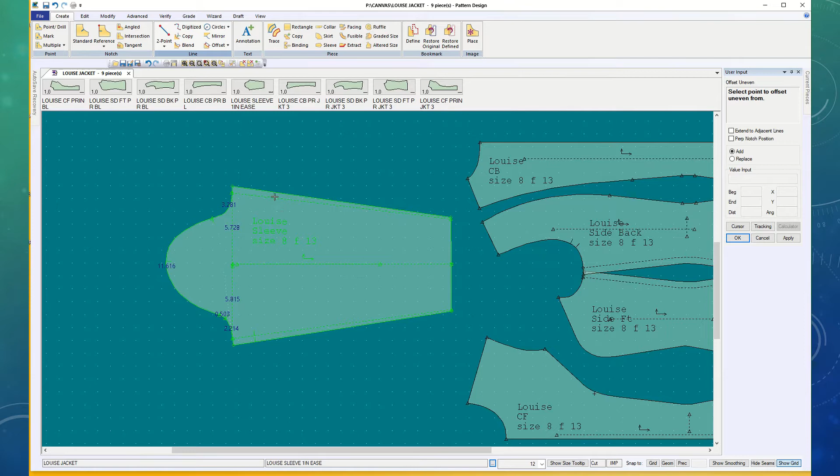I could have come over here and chosen, when I did create offset uneven, I chose to add the line. I could have chosen replace, and then I wouldn't have to delete or swap. But I like you to see what I'm doing. So as long as you can keep track of what you're doing, you can select replace instead.

But sometimes I like to see what I did and leave the lines on until I get all finished so that I know I've done all the things that I plan to do. But you're young and you have fantastic memories. Just keep track of it, or it won't sew together properly.

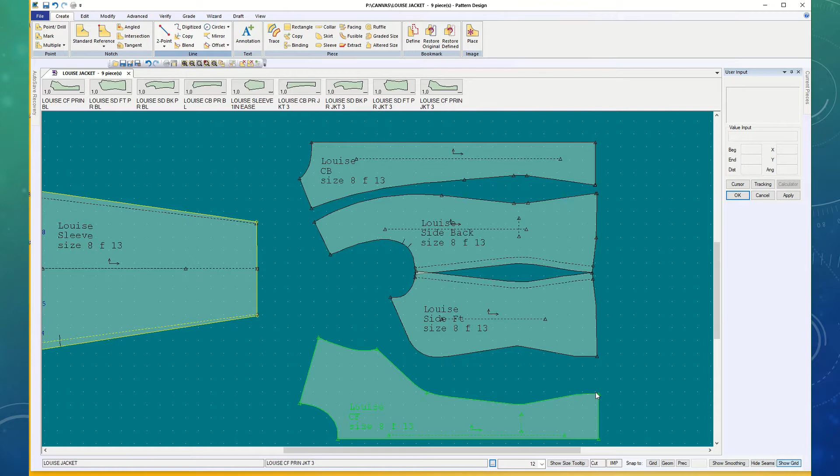Okay, right here, I don't really want that to hug the body. I maybe could leave it on the side. Maybe I do want it to hug the body. But this line right here in front is awkward, and I would rather add a little bit of extra flair to it.

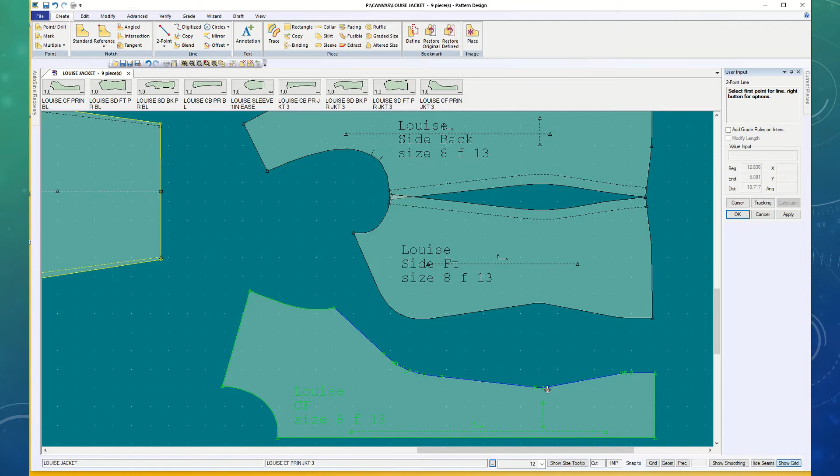So to do that, I'm going to create a 2-point line, and I'm just going to join this line and bring this line out. And as I zoom in, I can see where it's on top.

I don't want to make it any smaller, but now I've got this line and I can swap that and extend it out. But I want a copy of that over here, and I want it to be the same angle as this one.

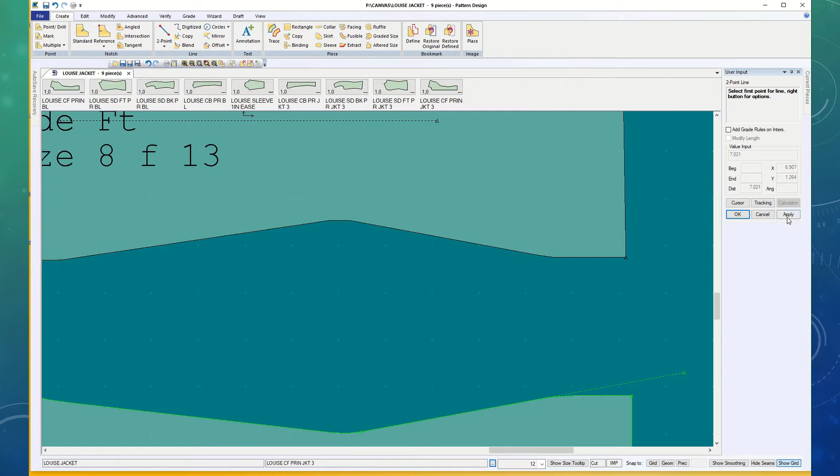So I'm going to say OK, and that one I didn't have to say Apply. I don't know why you have to on the other one, but you do. So since I want the same line, I'm going to create mirror, and I want to mirror this line. I don't have a line in the middle to mirror around, so I'm going to mirror around a straight line.

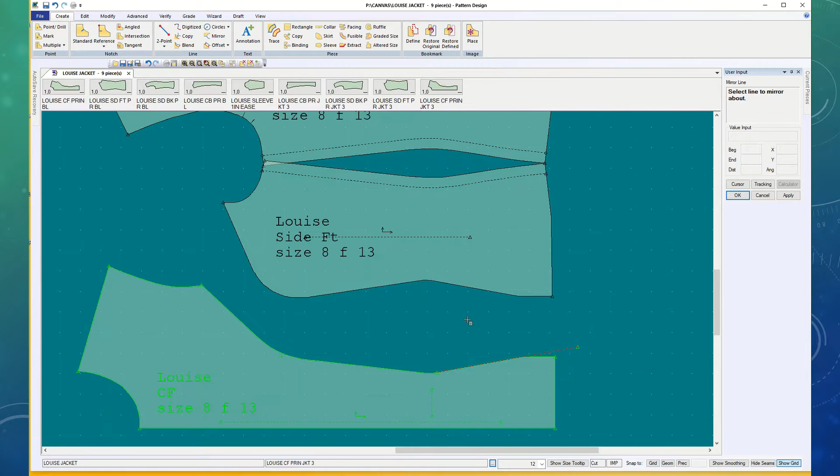And when I did that, the line ended up over here. And so I'm going to copy that and put it on this piece. Create line, copy, because the important thing to me was to get the correct angle.

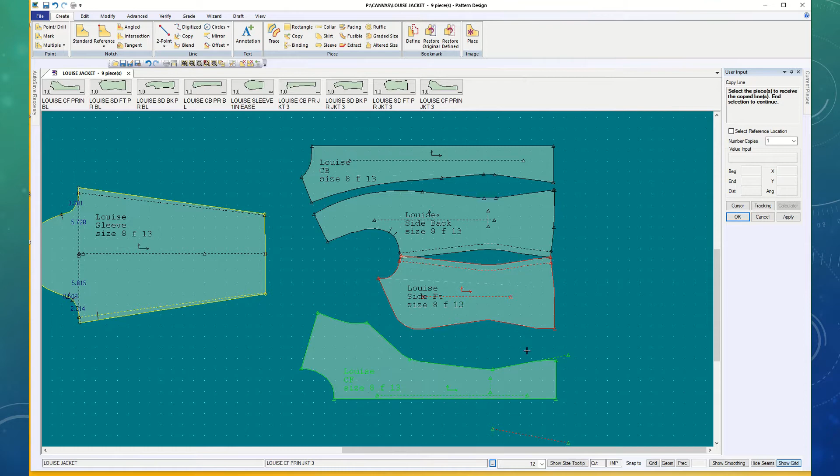So I'm going to copy this one, and I'm going to put it on this piece, and say OK, and now I've got the line, and usually I say cancel, but this time I want it to end up right on the line so I can swap it.

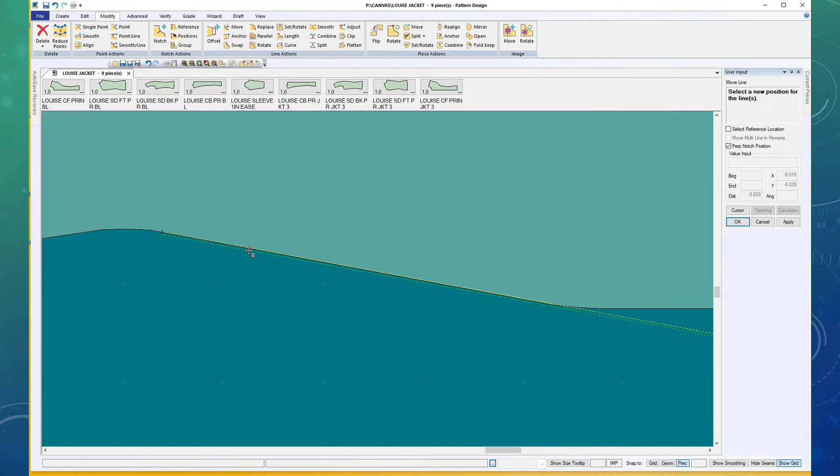And it looks like I didn't quite get it. So I'm going to move the line, modify line, move, and it is possible to come down here at the bottom. If you look at the bottom of the screen where it says precision, I usually hate precision, but sometimes it can be helpful. I still don't think I got that as well as I want to, so precision isn't being my friend. Okay.

Zooming all the way in. Oh, look at how far off that was. So I'll just set it down on top. Okay.

So you know the drill: split and swap. Modify line, split. Zoom in, split the solid line where the line ends. You can do them both at the same time. Say OK. Modify line, swap. Choose the dotted line, trade it for the solid line.

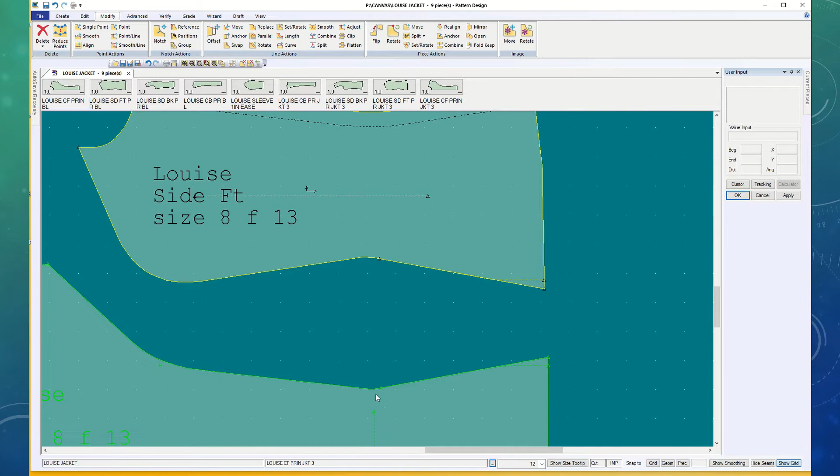Same. OK, and then delete. So now with this line, we're not... if you have a bit of a mush ball in front, that's going to fit better. If you are nice and perfectly flat and well toned, you might want to show off your shape exactly. So that's up to you, but that's the choice I made. But you don't want it to be an abrupt change, so at least put in a curve if you don't straighten out that line.

Delete line, this one. Okay.

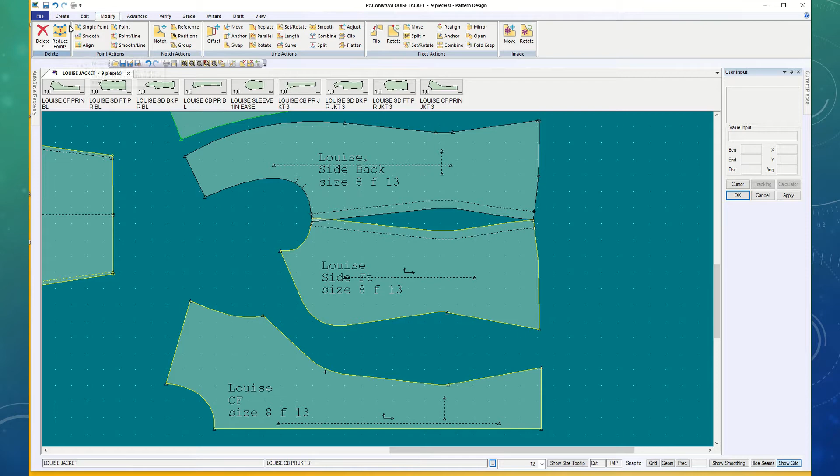Wow, how am I going to decide that? What would happen if I put a straight line there? Create 2-point line, zooming in, how straight is that line? It's going to be a little weird to try and line up and do the hem.

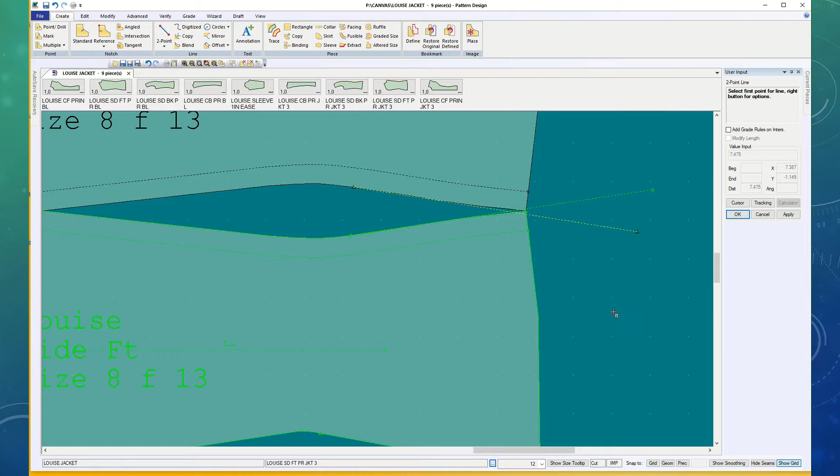And if I come straight across from this and put in another line, maybe I don't have to do all of the flipping. Maybe that's going to be just as easy. Modify line, split. It depends on how steady-handed you are and whether or not you can tell if you're lined up on the line.

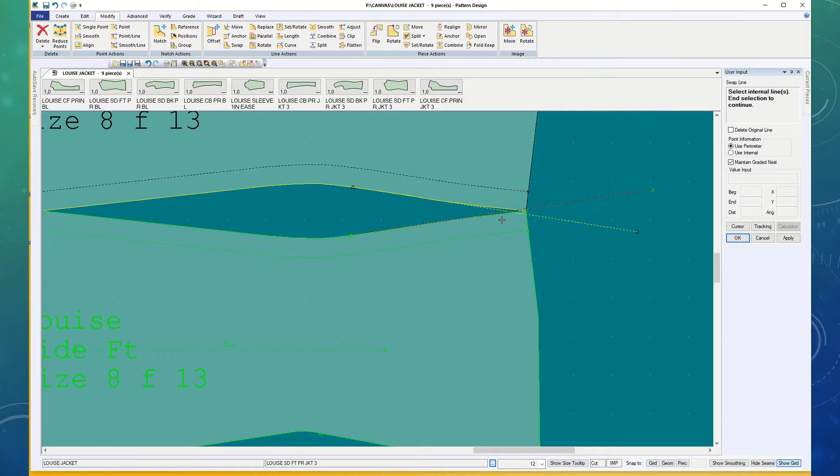If it's less than a 1/16 of an inch, you can usually get away with it. But if it's a lot and it makes a difference in the way it looks, in the long run, you're not going to want to put something into production that looks messy, that is harder for the sewers to sew.

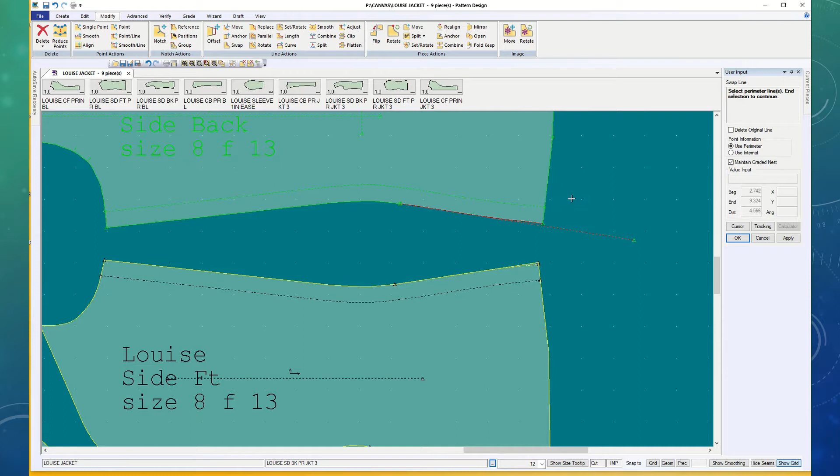Delete the line. I have to choose that in order for it to know that's what I mean. Okay, so I need to merge. Modify line, combine.

And if I'm going clockwise, it's opposite, depending on the side of the piece. These I will eventually need to merge, but I'm not sure if I need them yet or not.

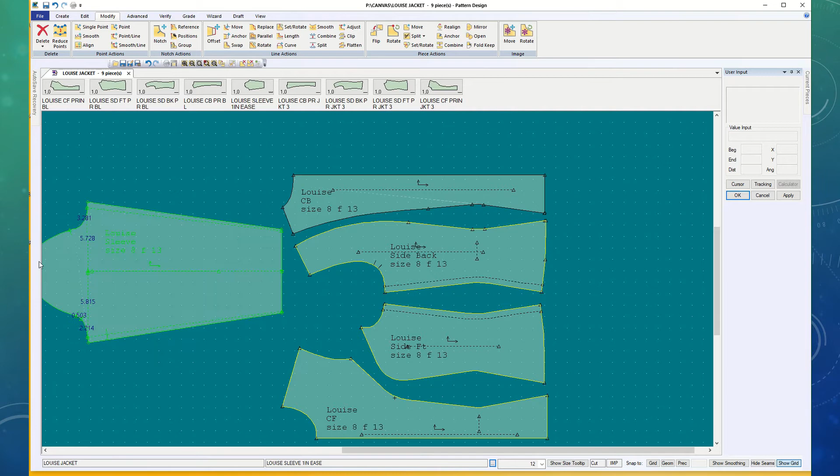Okay, so the next thing I'm going to do is clean up the hem. You have already changed your sleeve, and I've got the fitted one, but if you want gathers in it, then now would be when you would add.

And you spread it open with the slash and spread under advanced fullness, and you could do parallel or variable or tapered, any of those. If you do it that way, if you end up with...

I want 2-point curves. If you end up with your curves kind of apart like this, then you're not going to want to come along with a straight line. You might even want to come along and raise it a little bit depending on the look you want. Or maybe you'll just make a small blend right there, but it isn't going to be a straight line. It's going to be a smooth curve there.

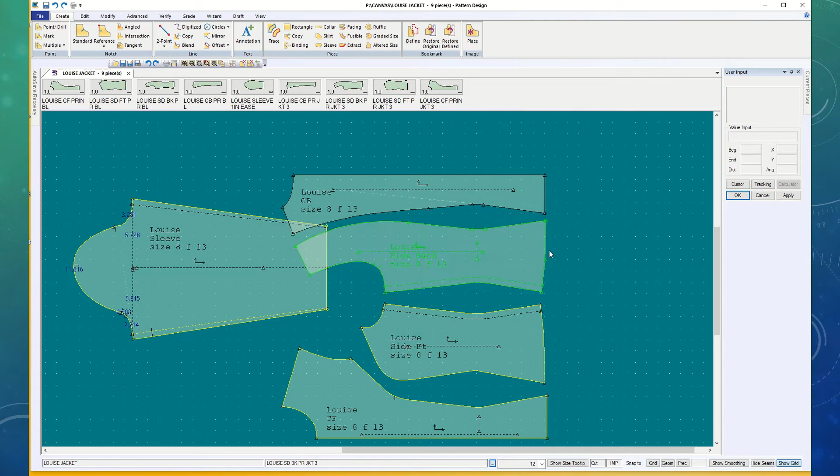Okay. So now we need to do the hem. And if you want to, you can lengthen it now. Just lengthen them all the same amount. I'm going to just leave it that length. Modify, set, rotate.

I want to start at the other end. The one that's not moving is first. Cancel. It's a lot easier to put those together to smooth the hem if they both end up straight. Another way to do this and not have to say cancel is to switch to value.

Well, that's not going to be good. Do I have that on the other side too? Okay, I guess they'll line up and we'll fix it when we're changing the shape of the curve. Modify, set, rotate. Same.

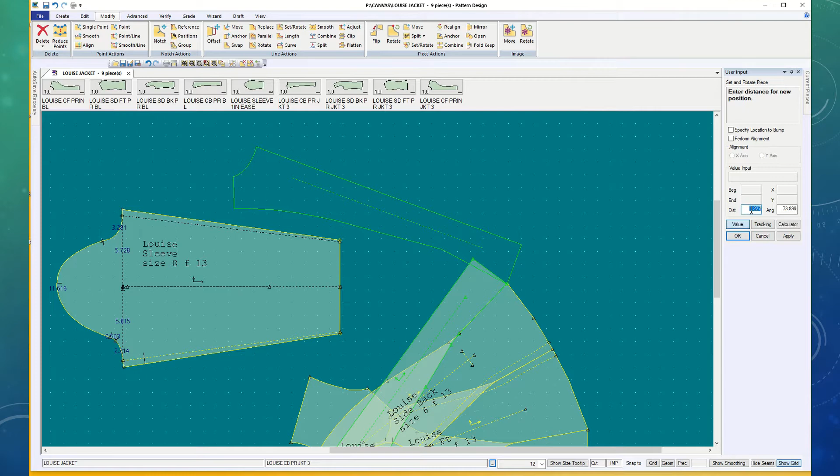But if it's on value, you can type in 0 and say OK, and it does the same thing. So 0 or cancel. So nice smooth curve, I've got right angles at the beginning and the end. And I may or may not want to do it all in one shot. Try it, I want to keep the right angle for a while. I think that's going to work out really nicely.

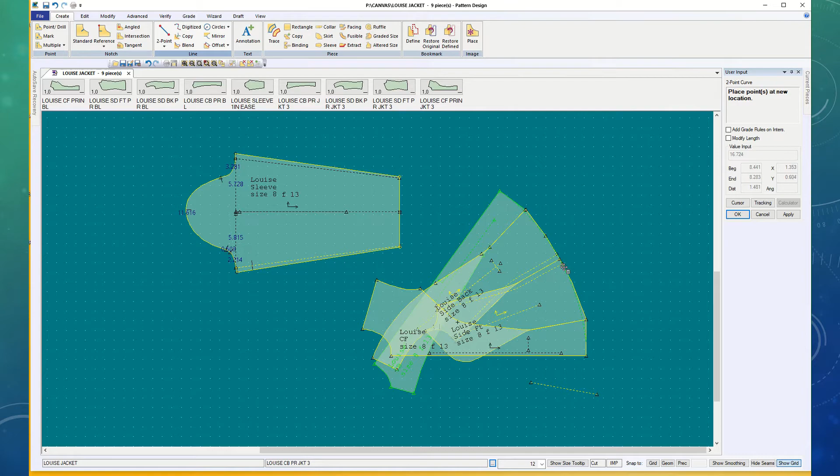So I'm going to copy that line that's attached to this front piece. No, it's attached to the back piece on each of the other pieces. Create line copy.

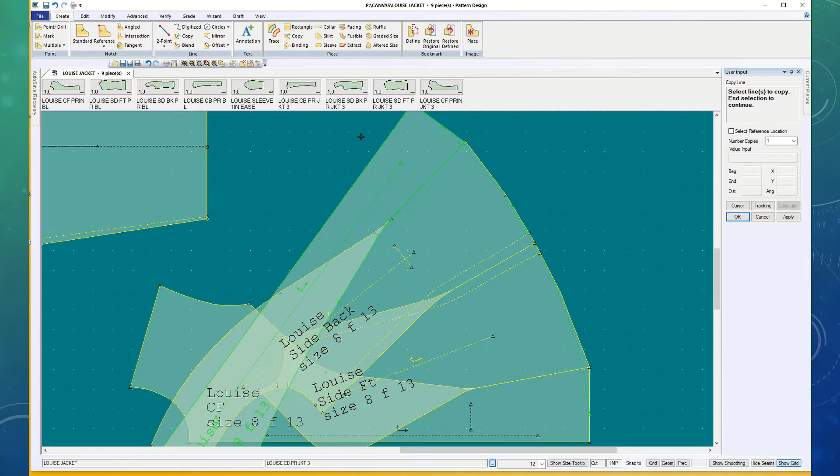Touch when it's the right color and then slide. So that's the line we're copying. And the pieces to receive the line are all of them. And say OK. One copy each. And cancel. Say OK.

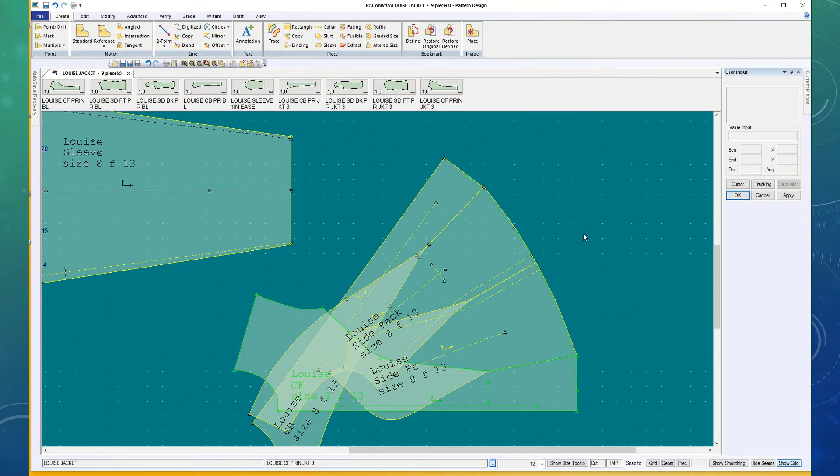And they each have one copy. So that's handy. I think usually I make you sit through copying them all, but you can do them all at one time. So you'd split the line and swap. So I'm going to put them back,

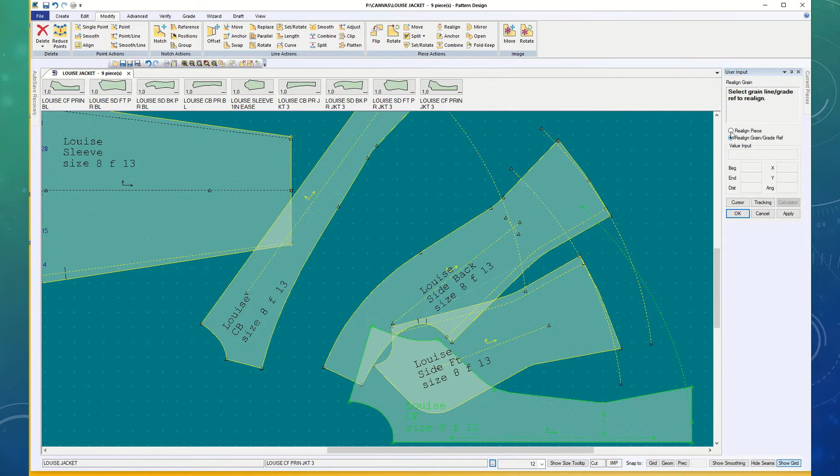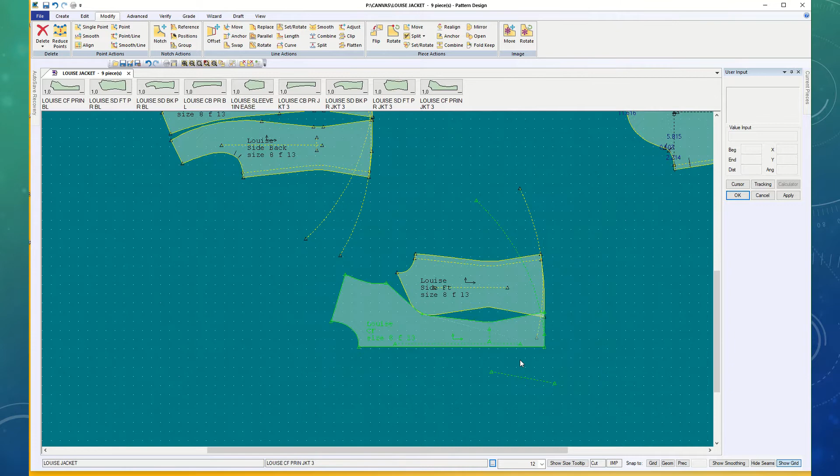modify, realign piece. So we're just realigning the pieces and the grain line, oh, for pity's sake. Okay. So you can swap the sleeve, you've got your back, you can fix the hems. And delete your lines.

Okay, so like the blouse on your jacket, you're going to want to put in an extension for your buttons. So 5/8 is standard, but maybe you've got wider buttons, so you could offset that more. This is still your center front, but I'm going to create a line and offset it even and come out 5/8.

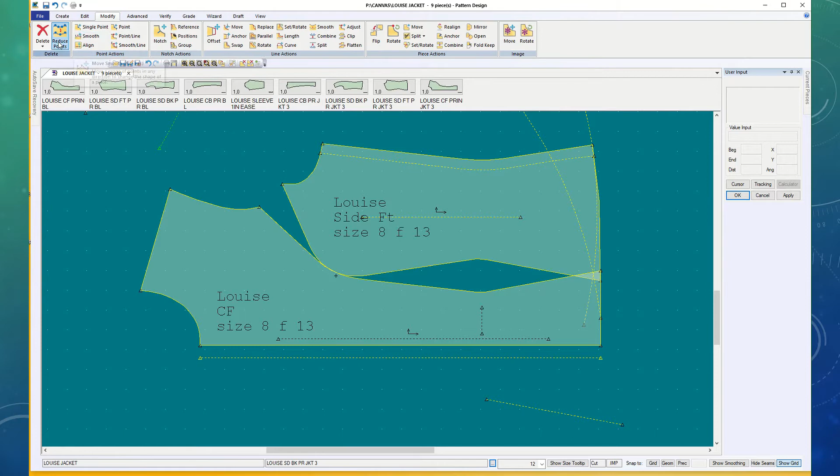So 0.625. Say OK. And then I'm going to swap those two so I can put my buttons down that line again. Modify line swap. Don't forget that that's your center line and that's where your buttons will go.

So what I want to do now is your lapel. And you want to choose a break point. You can have your break point high, you can have it low. You can tell what decade it is by what level the lapels break at. So I want to create a line that starts where I want my break point to be.

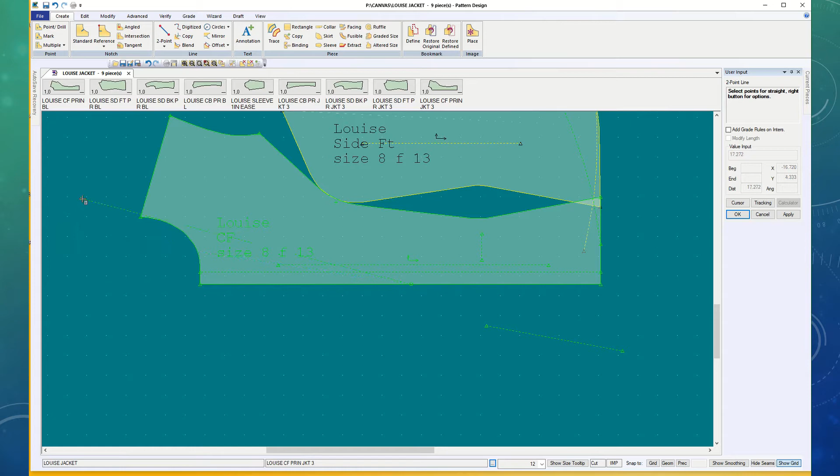And maybe I'll create a 2-point line, and we're going to start down where you want it on the center front, and then we're going to use it like a ruler so that we can come over and have it touch the edge of the neckline right here. So depending on how low you start, you want that to join the neckline. If I started here, then I would want it to join the neckline where it very first touches. And then this part of the line would get erased because you want to retain the shape of your neck.

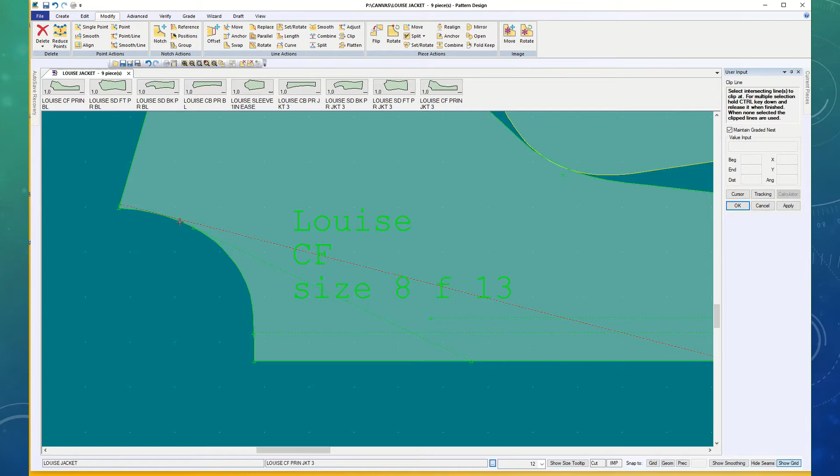So this line, when I finished it, either one, modify clip, I want to keep this line until it touches this line, or I want to keep this line until it touches this line, and apparently it's not actually touching that line, so I'm going to rotate it. Modify line, rotate this line around.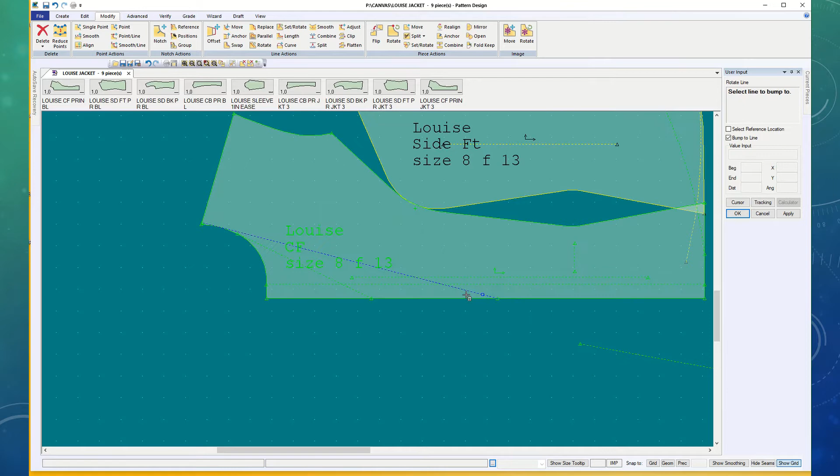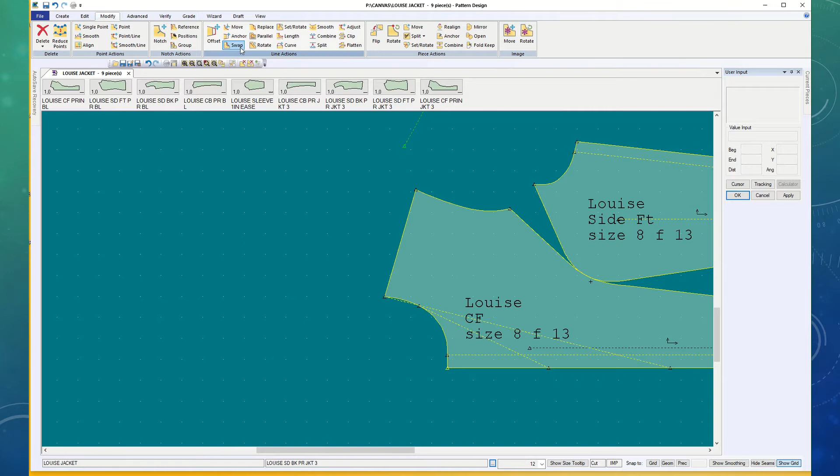And bump to line. And bump to that point. So I don't like where it chose to bump to, so I'd rather do it myself. Do you think I can get it this time? Apparently I can't say OK over here in the box. It's safer to say OK out in the water.

And I'd like it if they were more consistent with their commands too, but such is life.

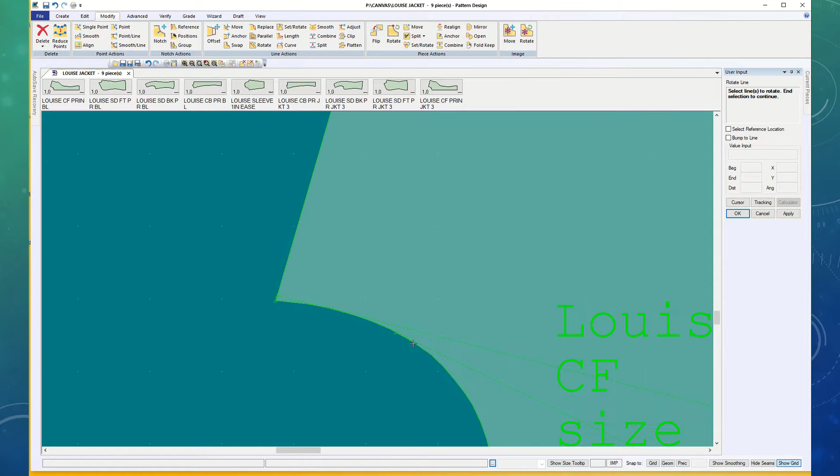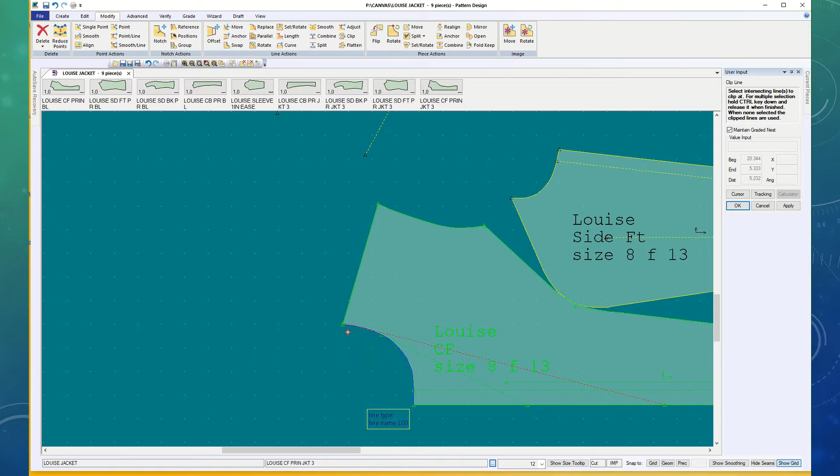Okay, clip. This line. Select the line to clip on the side to keep. There, okay. So if I were going with this line, I'd blend it shorter because that's where it's running into the corner.

And it might be helpful to you to get out the book and look at it and follow the instructions in your original pattern making book, not a digital patterning book. I haven't found a digital patterning book that always complies with good pattern making practices. So you can use your beginning or intermediate pattern making books. I'm also going to delete this one.

So at this point, I want to think about where I want my lapel to be and where I want my collar to come in. So I'm going to design my lapel right now, and I'm going to create it with some 2-point curves. You can use straight lines. This is entirely a design choice, but you're going to have a lapel that comes up somewhere in this neighborhood.

And I'm going to make it wide so it's easier for you to see, but you don't have to have it be that wide. And maybe that's what I want it to look like. And then I'm going to join that line and come down and join this line so that they're connected. And then I'll choose a shape.

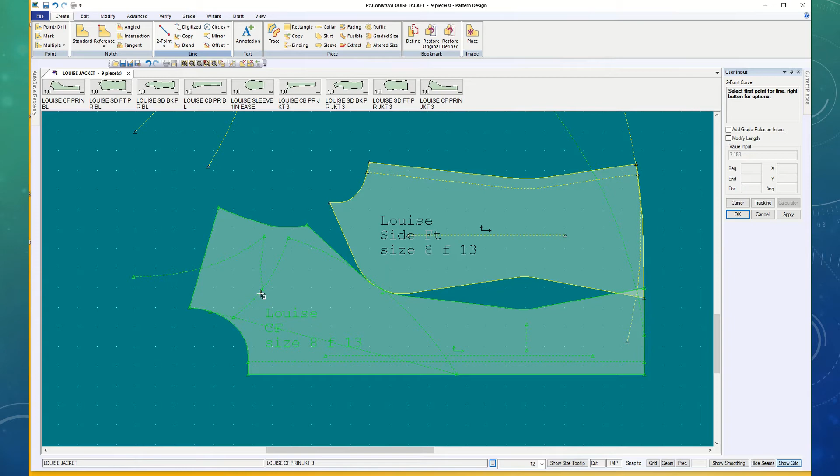So I'm going to leave that line attached to this so that when it's time for me to make my collar, I know how that collar shape is going to join in with my lapel. But we'll do collars on a different day. I will just leave them all attached.

So in order to get my lapel pattern piece, my front isn't going to just stay like this anymore, and it's important to have the extension on it already so that your buttons are going to be down here. So I'm going to mirror the lapel, but I'm not going to mirror it on the center front line or the front edge. I'm going to mirror it on this straight line that I created right here, because that's the fold line. You're going to mirror the lapel on the fold line of the lapel.

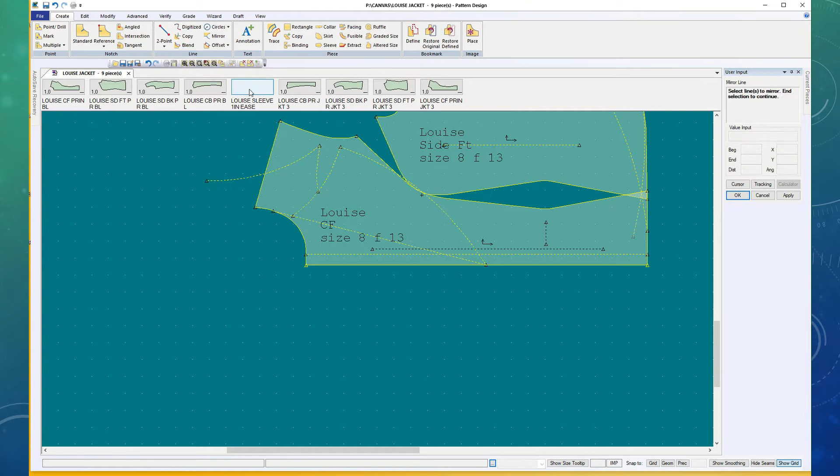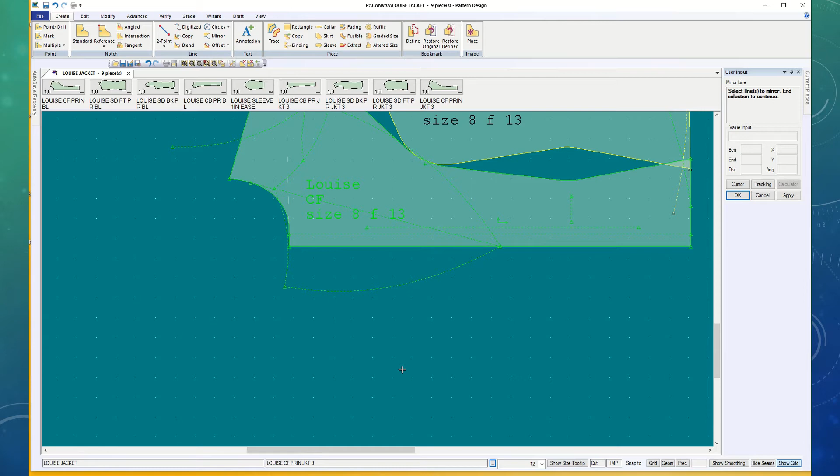So create line mirror, not piece mirror, but line mirror. Select the line to mirror. I want to get both of those lines. Say OK. The line to mirror around is that one. So my new shape,

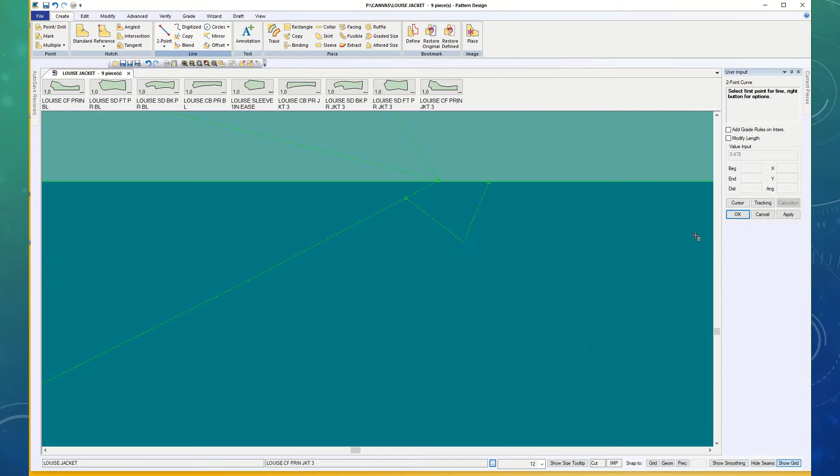and you can either have that be an abrupt ending, or if you don't want that to be abrupt, you could put in another 2-point curve and blend that. I don't think I'm going to, but you could. It's a design choice.

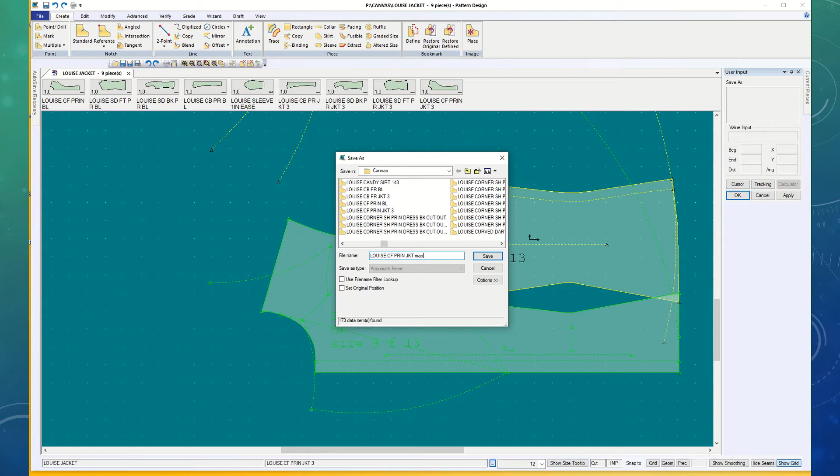So I need to trace off my front, and I'm going to leave this one as my map. So my jacket, this one I'm going to save it as the jacket first. So File, Save As, the lapel. So I'm going to save this one as my map. Yes, I never did say that right. Yes to all. So this one has now been saved as the map. The original is still the way it was.

If I want to go back and start a new one, my basic jacket that I've labeled as number 3 is a basic that I can go back to that has a certain amount of fullness added. And I've separately saved this as a map, and now I'm going to create piece trace my front jacket. So I'm going to have this line. I kind of want to trace that one, but I need to think that through.

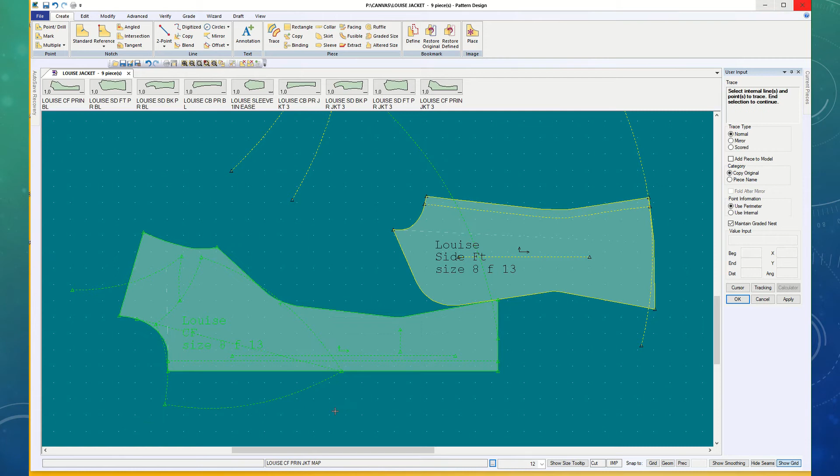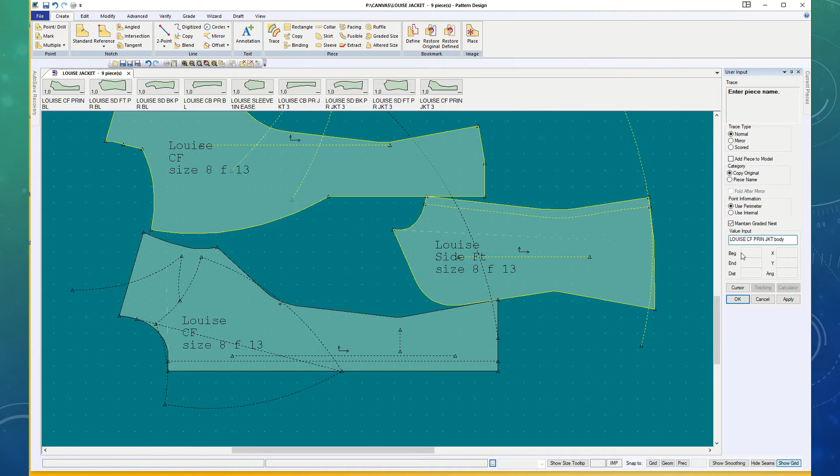Yeah, that looks right. So I also got my hem at the same time. So that's my jacket shape. That's my front. So that's my center front princess jacket. And I'm probably going to want to blend that a little smoother. You know, just right there, move one point, but okay, so that's a jacket piece.

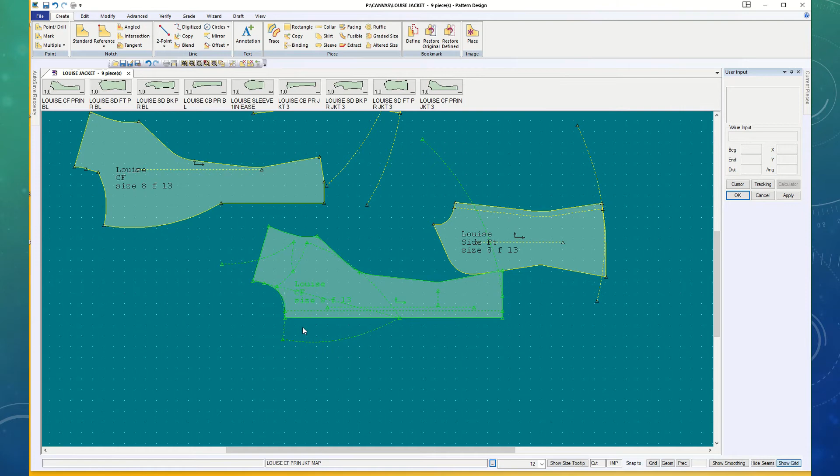And this is one of those things where you're going to add to the outer edge for that fold under. And, well, you're going to leave this one alone. It's going to be the under piece, and the facing is going to fold and be the outer piece. So if you imagine the part that we just traced off as a wool front and the lapel as a velvet decorative piece that sits on top, then that would be, I need to create some new lines for my front facing.

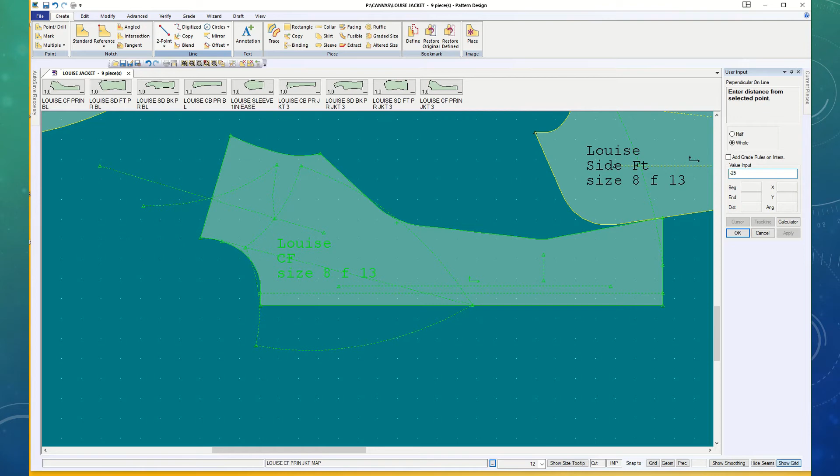So I'm going to do perpendicular on line, select a point of intersection. I'm going to say distance from point, and I'm going to move that out 2 inches. Say okay. So I've got my beginning guideline 2 inches away, and the bottom one I'm going to come out 2.5, but it's going to be negative because it's counterclockwise. Not negative 25, negative 2.5. Yeah. Okay. So that's going to be right here.

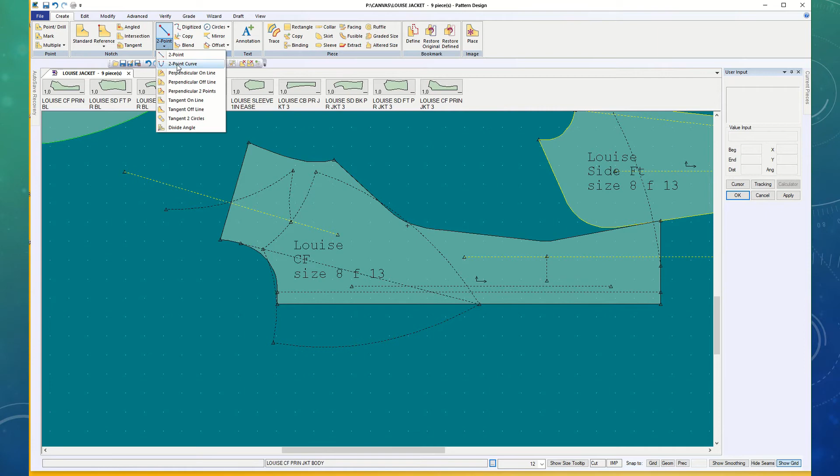So I don't want it to go all the way over into that seam. And now I can connect those two guidelines with a 2-point curve. So I'm going to join the bottom end of that one and just blend that neatly. Sometimes on patterns you get from companies, they have an actual angle there, and those don't run through the serger as well, so you want to give the sewers a smooth curve. So now I'm going to trace off my front facing. Create piece trace.

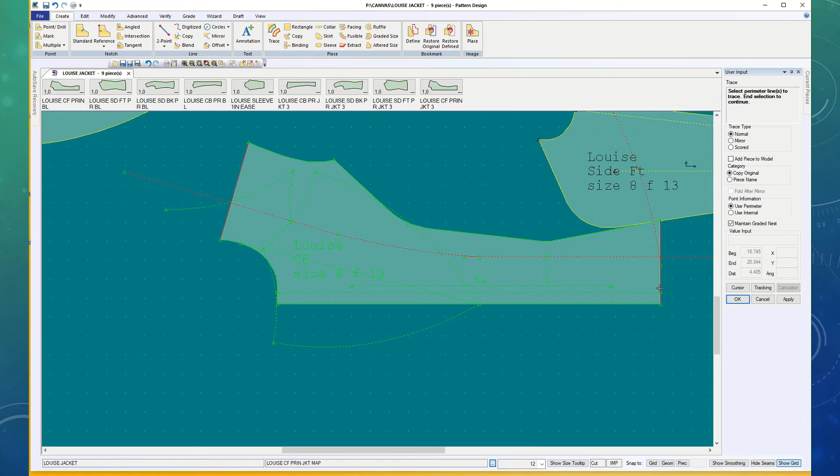And I still want that same line. And you noticed how I was careful about the part of the line I chose, which is why I was able to get the piece without splitting it. So that is my jacket facing, and it's the front. It already says center front, so I'm going to put facing on it. Okay.

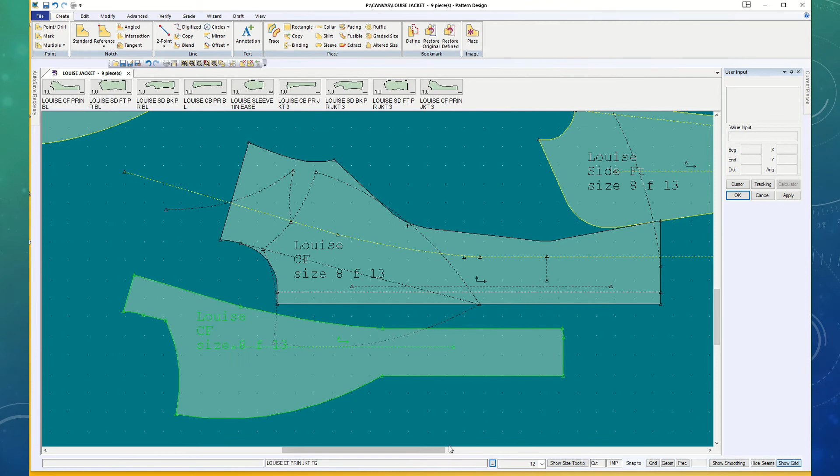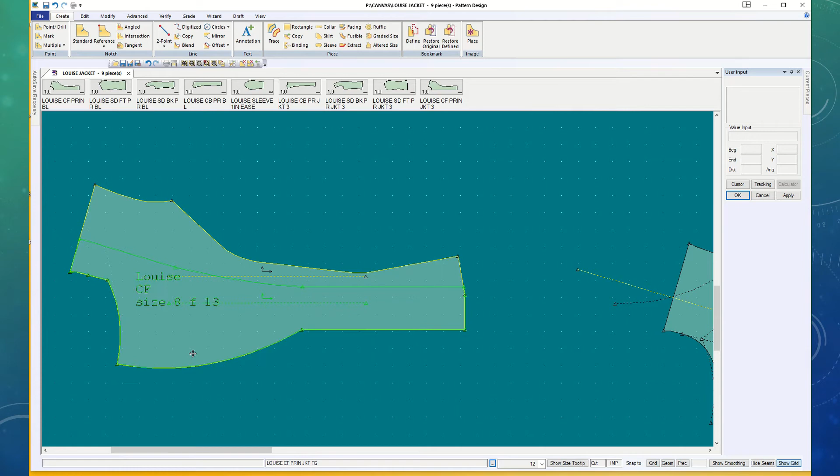So if I've got my front jacket, and this is a wool piece, and this is the velvet piece that I'm sewing on top, they'll sit together like this, and I'll just sew up and around. I'll end up including the collar later, but I'm doing a simplified version. You can do more difficult versions in the book, and you're welcome to do that, but some of you are already miserable. But you want the one that's sitting on top to be a little bit bigger.

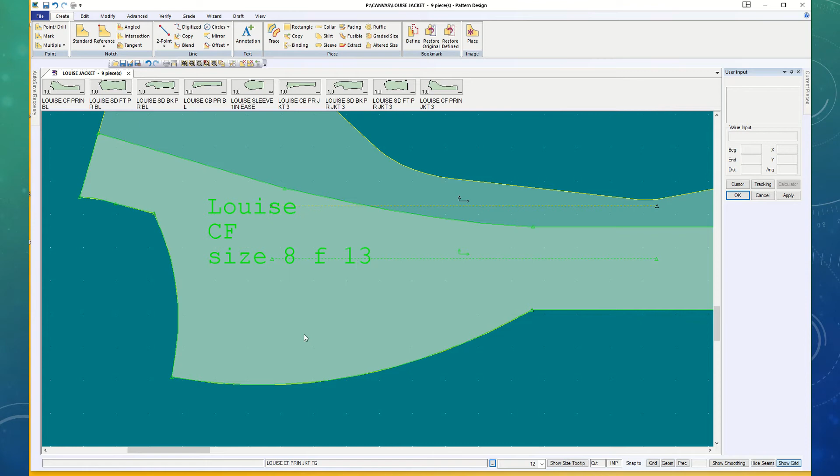So I'm going to take my velvet one that ends up on the outside. It's weird. The facing is on the inside down here, but this folds on this line and ends up on the outside. So in order to make that work the way I want it to, I'm going to combine some lines. Modify lines, combine clockwise and in order. I'm going to get all three of those and all three of these. This one I might need to split again before I give it seam allowance.

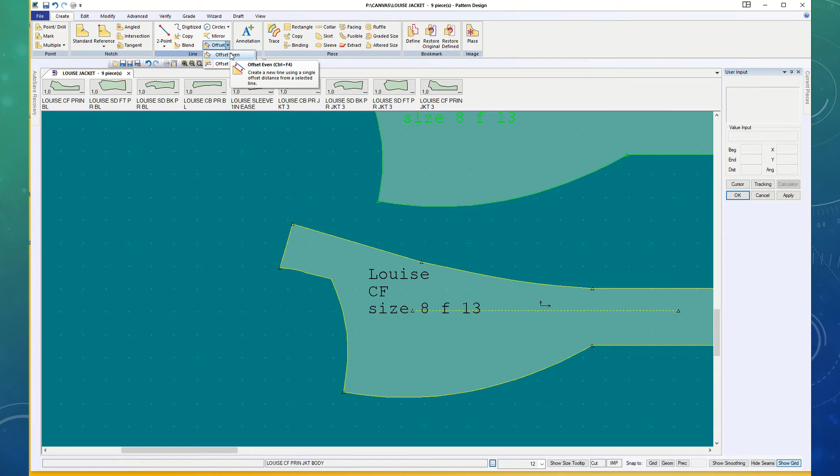But what's going to happen is that we're pivoting this line out and this line out separately, but only on this piece. So I have it split here, and we're going to use create offset uneven again. And I find offset uneven frustrating. I could just copy the line and rotate it out if I wanted to, but we'll try this. So the point we're rotating uneven from is here, and that one is going to be 0, and I'll say OK.

And the other end, I'm going to come out 0.25, and this has a lot to do with what type of fabric you're using. I'm okay with that with velvet or wool. If it's a lighter weight fabric, you might not want to bring it out that far. Okay, so this one we're going to go with 0 again. Oh, that's right. Apply and OK. Now I can move on. I forget that every time.

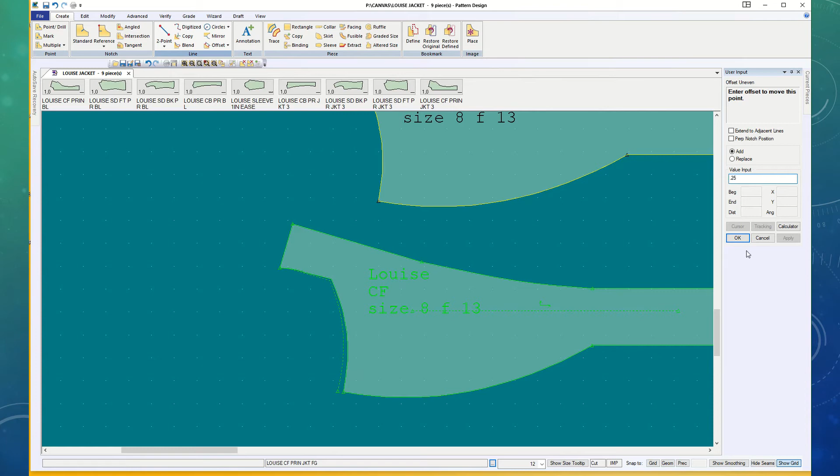And this end is 0.25. Say OK. And when I swap these, I'd rather just bring them out and let them cross over so I know what I'm going to get. So modify, adjust, modify line, adjust. I didn't accept it and say OK. That is so annoying. Okay, well, you'll learn from this and not do what I did.

Create, offset, uneven. Choose the line. Select the point to go uneven from. OK. The other end. 0.25. Say OK. Then apply and OK. And now it's permanent. So I can go back to modify line, adjust again. Pull those out. And then I'm going to clip them. Modify line, clip this line until it touches this one, and this line until it touches that one.

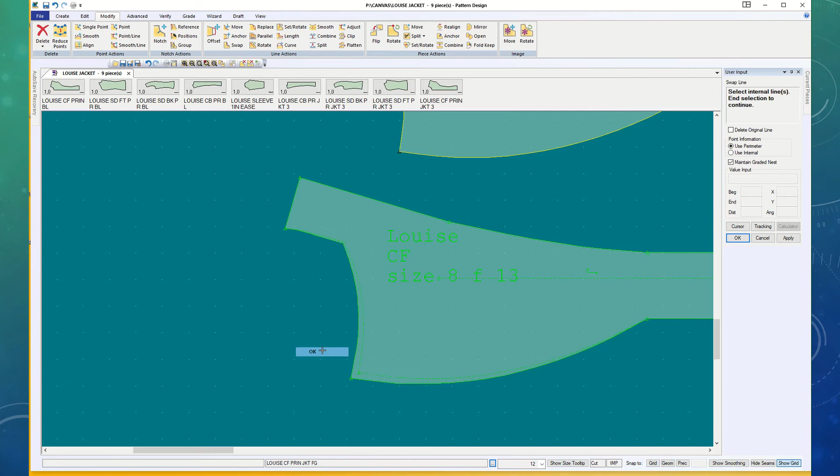And now when I come in and swap, modify line, swap, clockwise and in order, I'm going with the new ones and getting rid of the old ones. And I'm going to leave those there so I can see them. Okay, so now when that sews together, I will have to carefully ease in that much extra along here, which is why people usually like using wool for jackets.

Sorry, I didn't mean to do that in your ear.

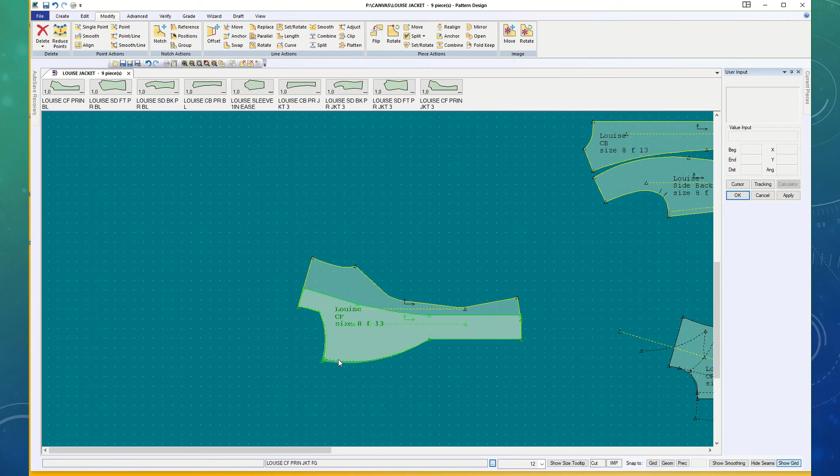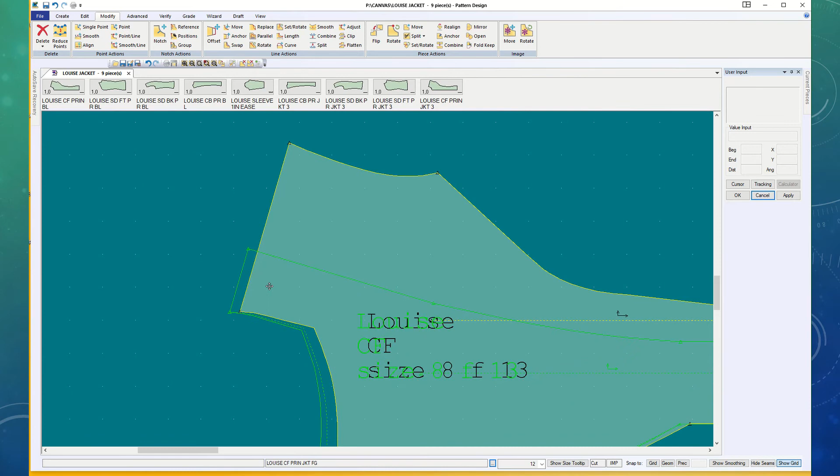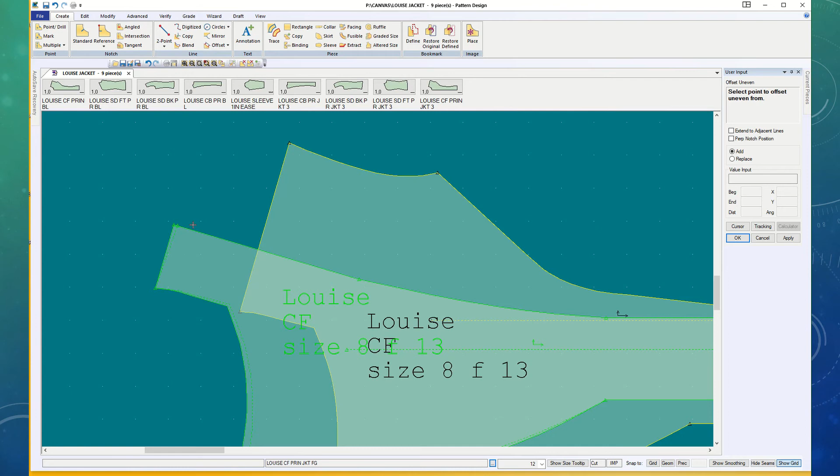But I need to say apply and OK. And then I'm going to wait to swap that one. I want to make my lining piece. We're just keeping this a simple lined jacket. Alright, I think that's enough for this video. We want to add all the pieces, but I should swap these first.

Modify line, swap, and internal line, and clockwise in order for those two. Oh, I can't do that. Have to split. Splitting and clipping and swapping are very mundane.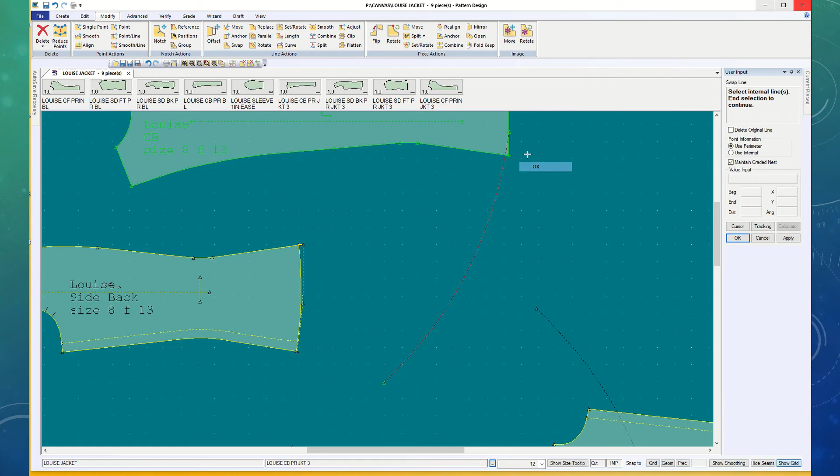And it cut off that weird little thing, and we didn't have to fix it. Those I think I'm going to go ahead and delete. No. Uh-oh. I made a mess. Well, you know how to fix that. It's simple. We have talked about it before, but we always forget. So cancel. I want this line to come back here where it belongs. Doesn't it belong over there? I think it does. Anyway, I'm going to

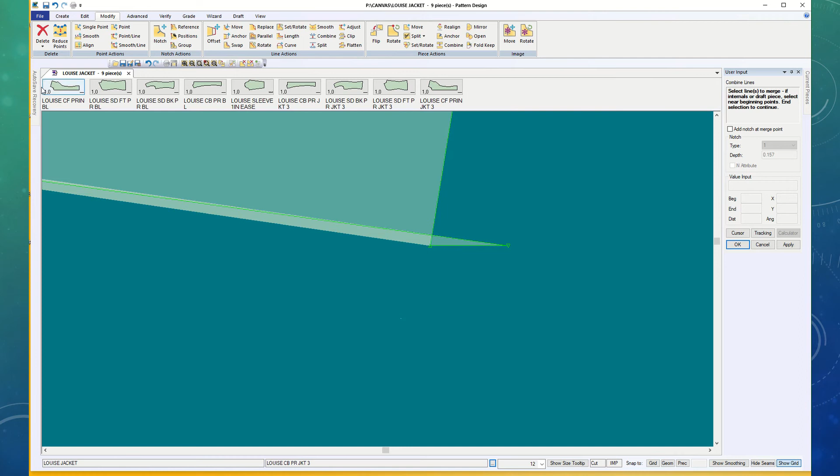Modify line, combine this line and this line because I want to delete this point. And I am not going to be able to, well, maybe I will. Delete point, and it's gone. So now my jacket's gone back to where it belongs. And if I combine those into one line, modify line, combine clockwise in an order, I have a little corner right there. So if I go up to edit point

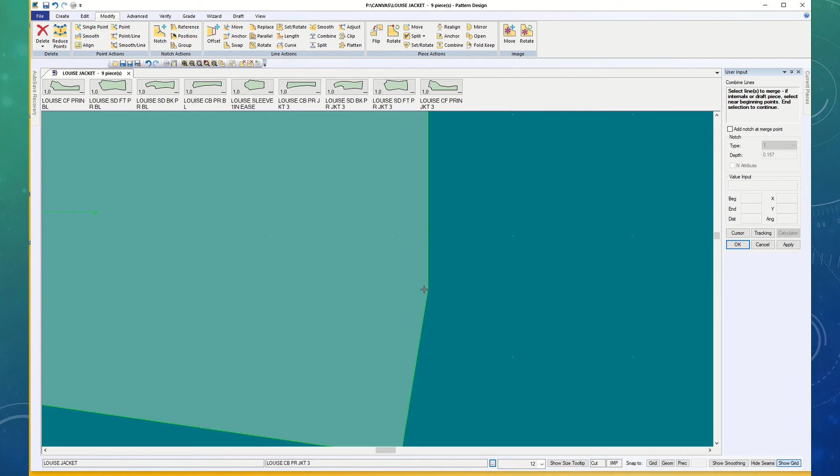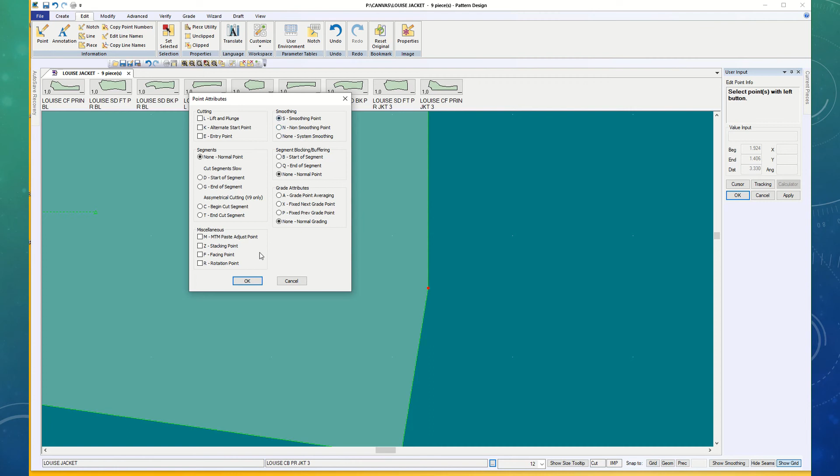and choose the point right here, it has an N point on it, and I want to change that to an S point. You may not remember that, so you just click on the little dots. Oh, I need to choose the S point. So instead of non-smoothing, we have a smoothing point, and say OK and apply, and now it's all pretty. That one you might want to rewatch.

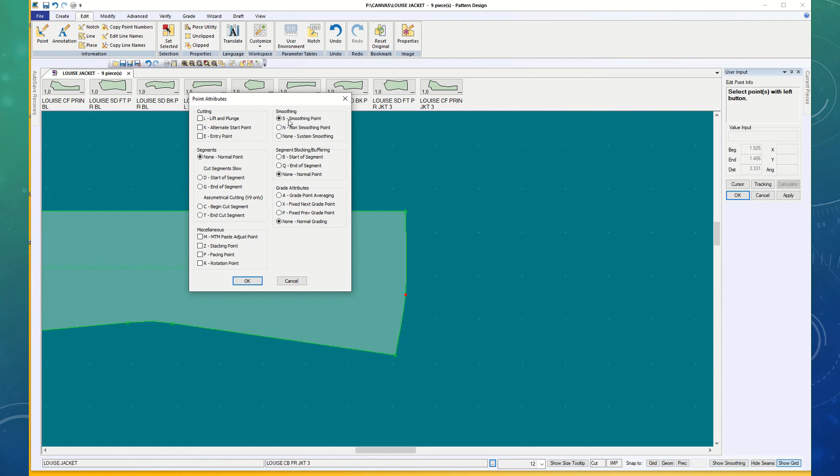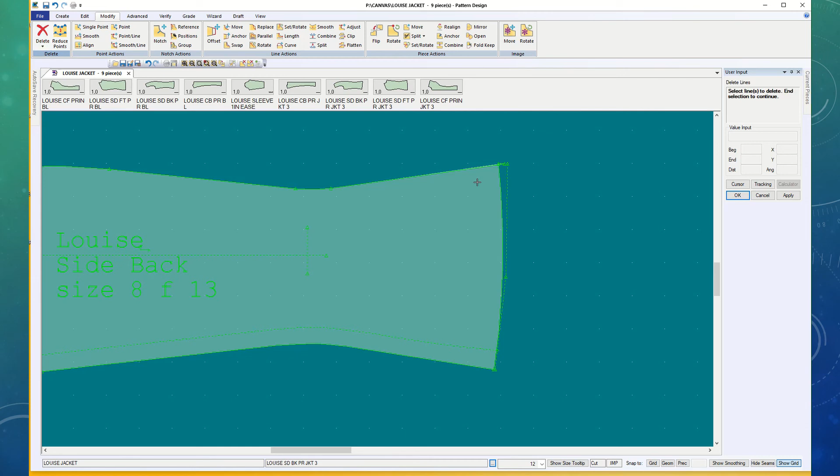Edit point. Choose the point. Come down to attributes, click on the little dot box, and choose smoothing. And if you've got one with the opposite problem, you can put a corner on it. Things like that happen near collars often. Yeah, we've got another one right there. But that will be good practice.

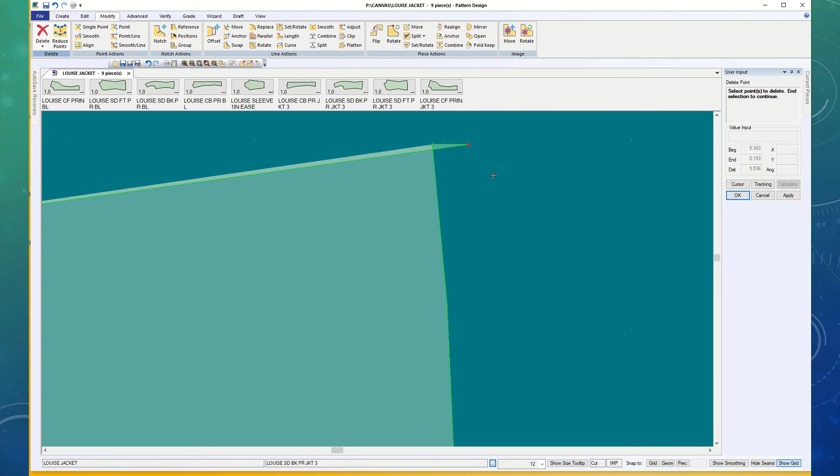Okay, so the point we want to get rid of is this one down here. And we can't delete the point if it's the end point of a line, so we have to merge the two lines attached to the point that needs to go. So combine those two lines so that we can delete that stray point. These are great practice things. Okay, those two are finished for now.

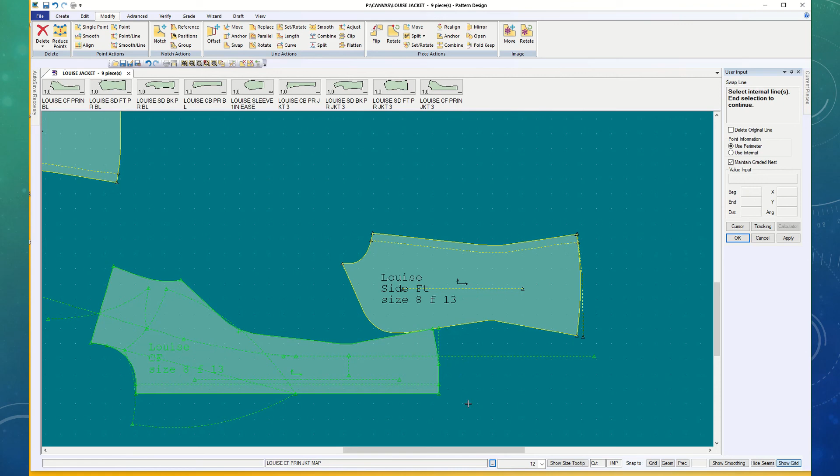And swap. And that one's going to need to be split. Oh, but, well, I guess. Okay, I'm going to clip that one where it runs into this. Didn't I say I needed to split that? And then this is going to need an S point too.

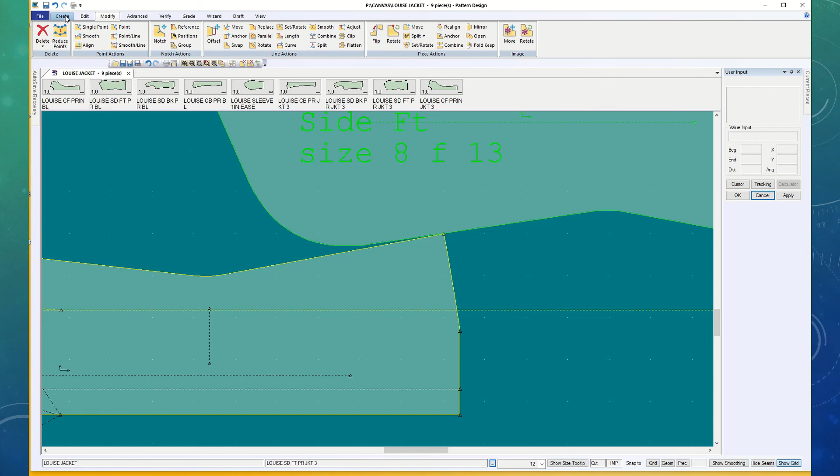Can you remember it? You have to combine the two lines before you can put in the S point. I think. Maybe not. Modify line combine. But I'm going to combine them. And then come up to Edit, Point, choose the point, and there's that N. Choose the dots, switch to S, say OK, and then apply, and that's just so much prettier. Then say OK and the box goes away.

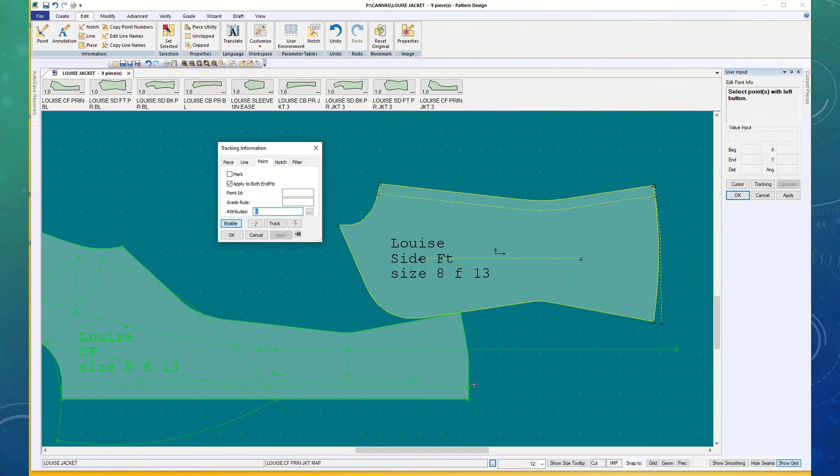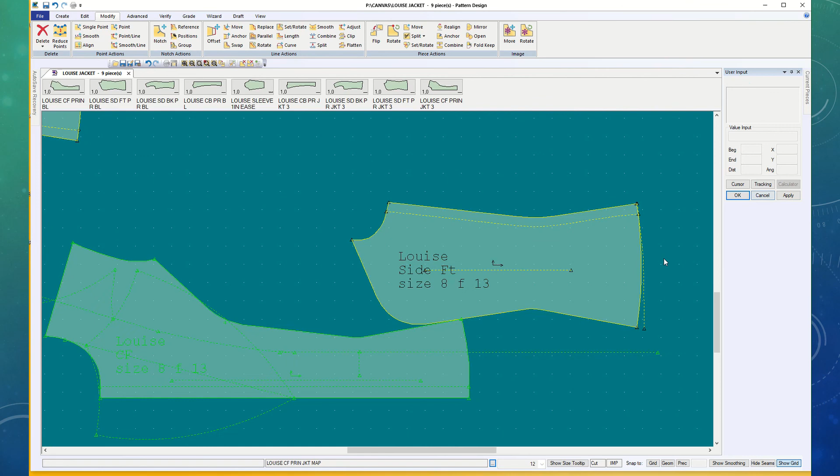Modify, delete line. Not that one. Cancel. That, no. Okay. So I want to save all of those pieces. I'm going to save as this one because it's not the same sleeve anymore. File, save as, and I'm going to jacket 3 to match the rest of them. Oh, 3 for 3 inches. I remember now.

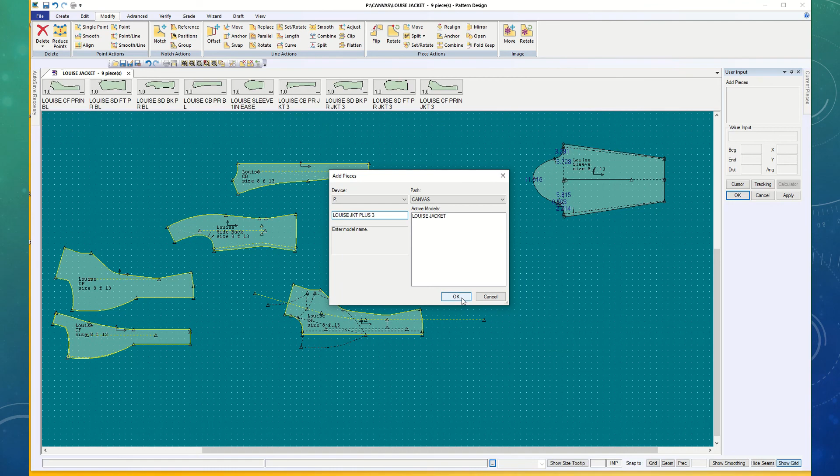Okay. So we're going to make a new model. File, add pieces. I don't want it in Louise jacket. I'm going to make it Louise jacket plus 3. As long as you can keep track of it, you can save them the way you want to, but make sure that you take pictures and leave them on your P drive so that I can check your homework.

Select the pieces. So we want our map and our 2 new fronts and our added pieces and our sleeve that matches. And that's what's in there now. So the old pieces are a basic jacket that we can go back to and do new things and make it longer. And these have style lines added to them.

So I can do one more thing. I've made this facing 2 inches wide, so I need a facing to match back here, but I think I'll do that when I do the collar. So we'll pick it up there.